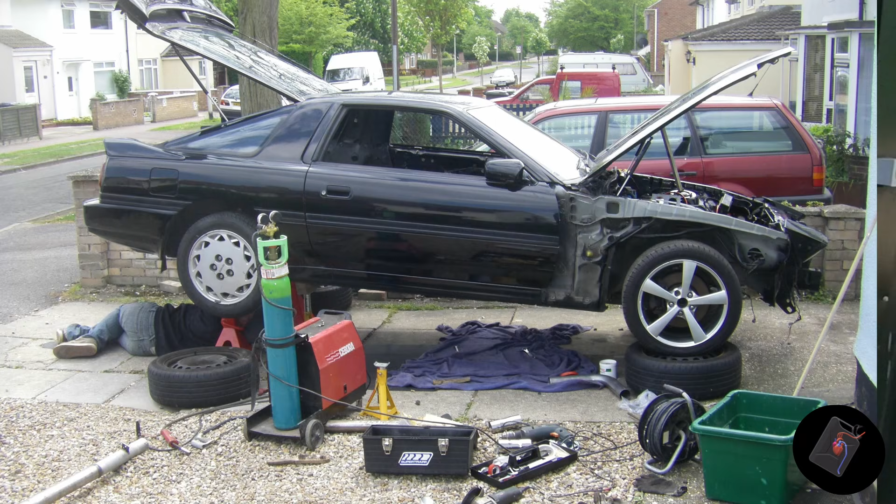The E21 is a 316 from 1983, so it's one of the latest E21s. I've owned it since 2015. I've taken it to the Nürburgring once after owning it for only 3 months, which is about the amount of time it took to fix most of its reliability problems. It was stripped out when I bought it with a couple of cheap bucket seats in it.

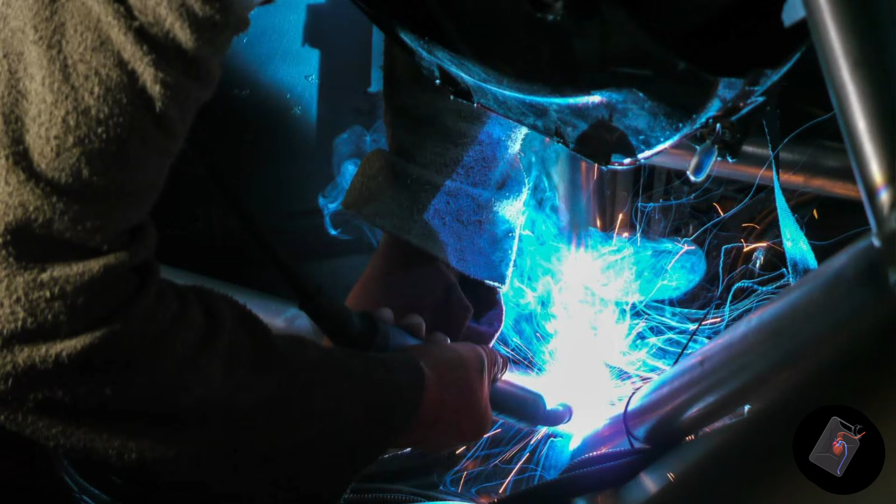Since then, I've fabricated a full 6-point MSA spec weld-in roll cage from scratch, which means I bought the straight tube and used the bender from Garage Sinister, where I used to work, to form the tube, which I then notched and welded in place. I really went to town on this cage.

One of the guides on YouTube on building a cage for a time attack car states that the tolerance on your cage should be 1/2 inch, which is 12.7mm. Mine is less than 5mm. It's a proper work of art, and I'm really proud of it.

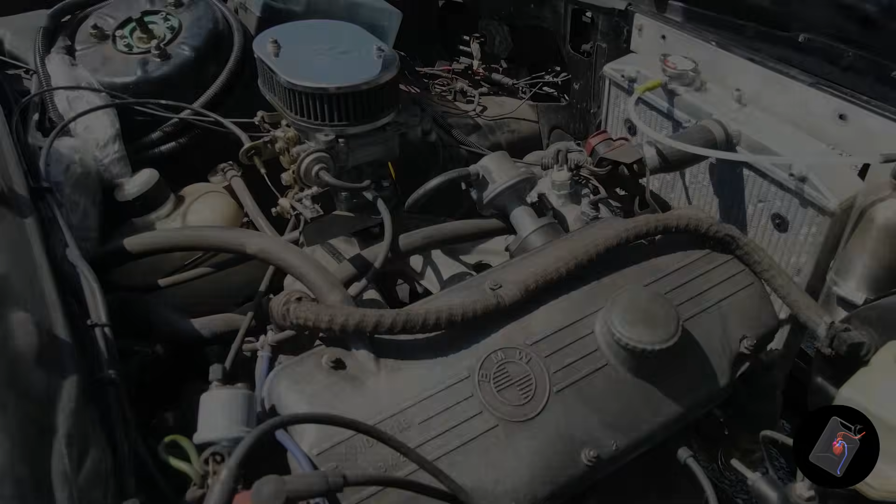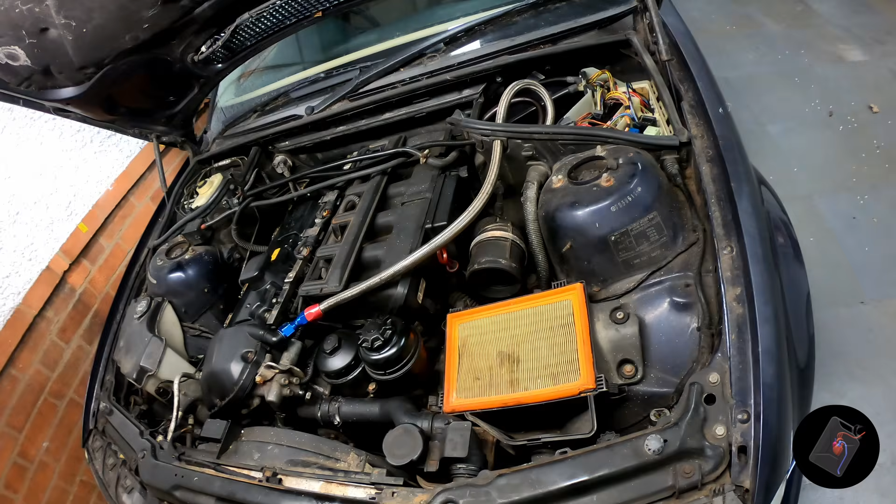The E21 is currently on the original engine, which is a 4-cylinder M10, and although it's badged a 316, it's actually a 1.8 litre engine with a carburettor. This car had already been upgraded to a twin Weber carburettor when I bought it, and I've had it on the rolling road, and it produces 80 brake horsepower. The M54 has, or at least had, 227 brake horsepower when it left the factory in 2001, which is almost triple. This engine is going to absolutely transform this car.

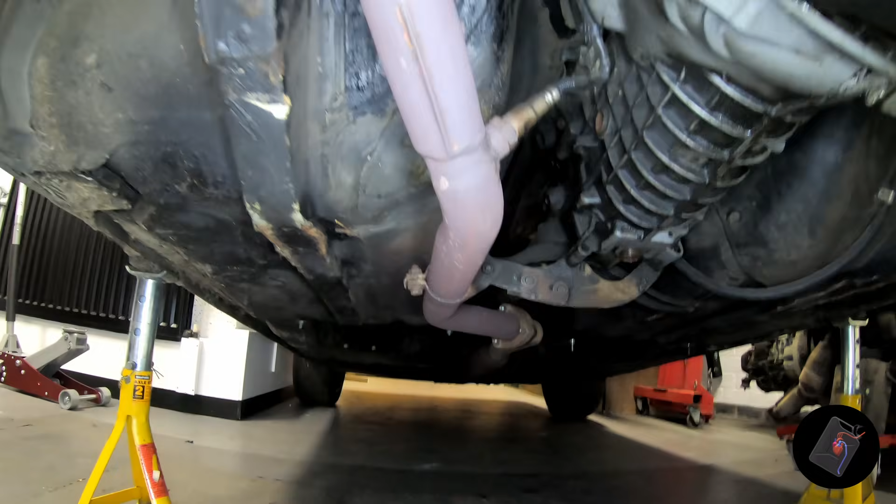Now, I'm not the first person to fit an M54 into an E21, so I am aware of some of the challenges that I'm going to face already. The first one being the exhaust headers are not going to fit around the steering column, and they probably won't even fit inside the chassis rail either. The gearbox mount is not going to fit onto the E21 chassis, so that will need modifying or completely fabricating from scratch.

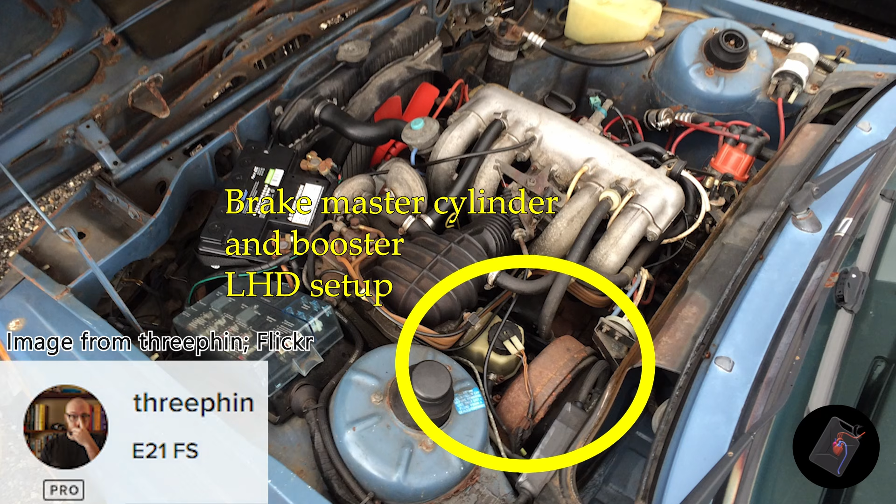The other thing is the brake booster on the E21 sits right at the front of the engine bay on a long extension bar, basically because it was never planned. When the E21 was designed and built, it was for the German market, so it was left-hand drive. When they converted it to right-hand drive, there was no space for that brake booster on the firewall, so it was moved forwards. It may be in the way when the M54 engine is in the engine bay. And then there's all the ECU and all the wiring that goes with that doesn't have a proper home, so that will all need packaging as well.

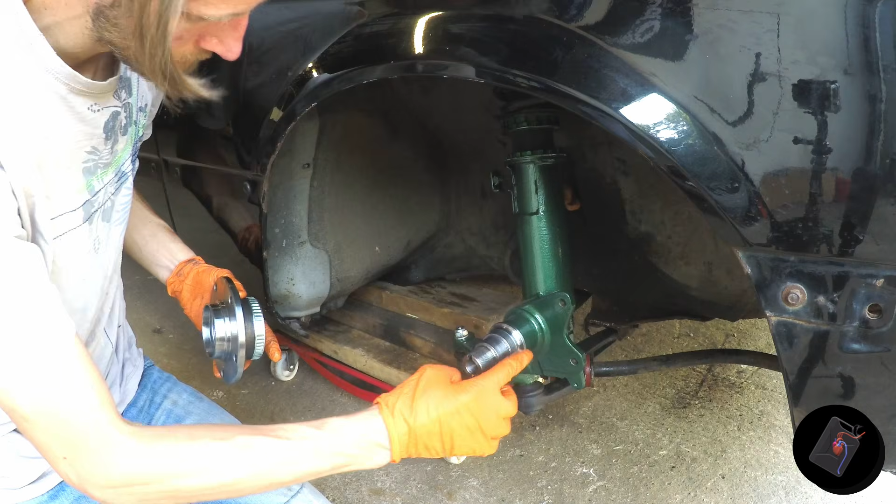I'm also going to upgrade the drivetrain so it will handle the extra torque from the 3-litre engine. I'm going to use the subframe, the trailing arms, the half shaft and the diff from an E28, which is the 5 series from the same era. Now that will give me 5 stud hubs on the back, which will match the front because I've already upgraded the front end to E36 hubs, which are also 5 stud. At the same time as doing that, I upgraded the front brakes to E36 discs and calipers, so I've now got enough stopping power for when the new engine is in.

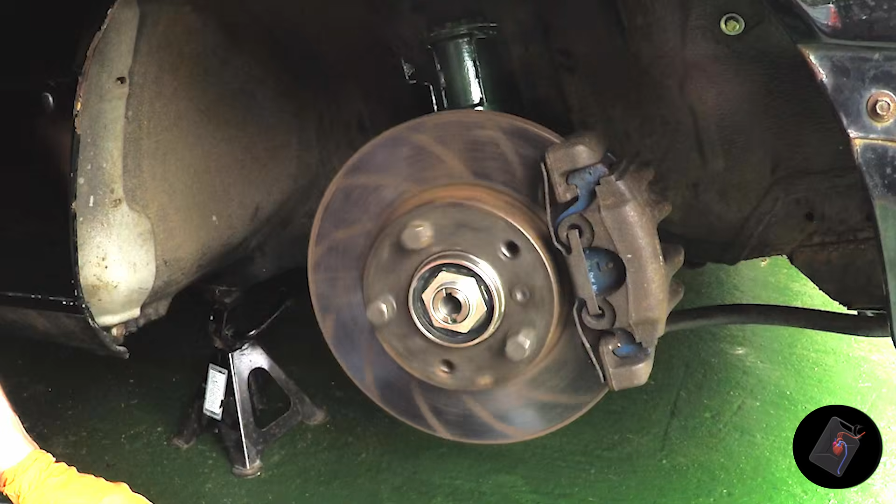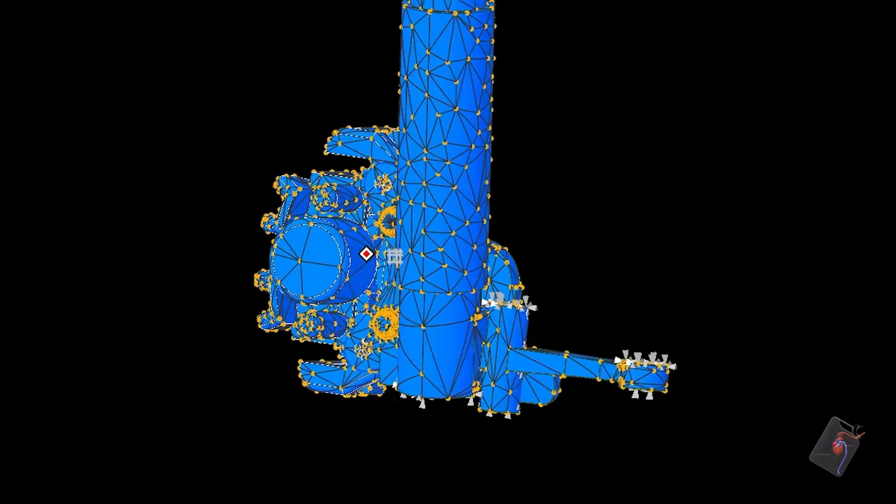You can see all the work that went into that upgrade, including all the CAD modelling, the FEA simulation, and the fabrication work that I did to get those parts to fit in episode 1.

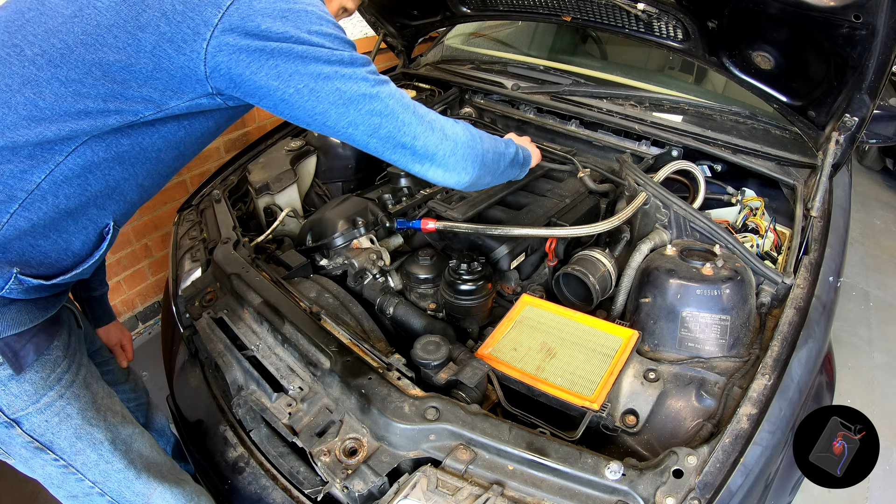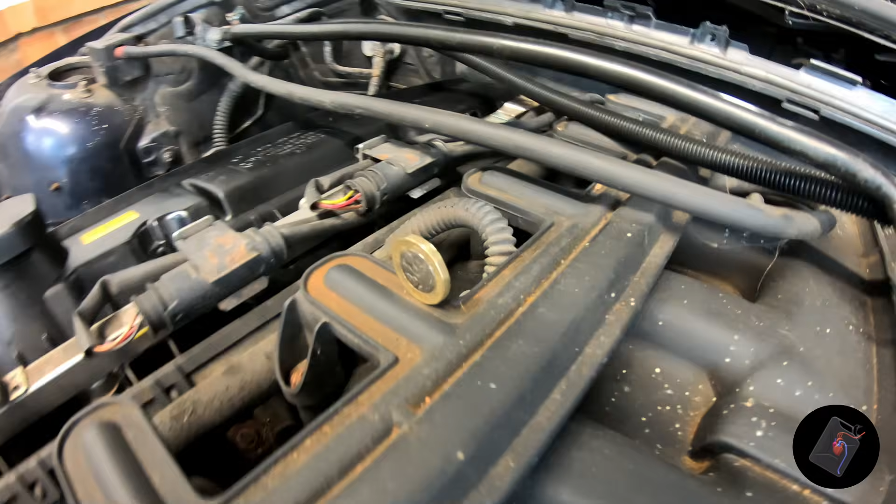For a high mileage engine, the results were actually pretty decent, with the pressures being between 165 and 180. Now that is a little bit lower than I would have hoped for, but they're within 10% of each other, which is all you can really ask for on an older engine. Plus, it runs really smooth and it sounds amazing. So I'm really happy with this engine and I cannot wait to get it in the E21.

The next job for me to do is to take the ECU out of the E46 and send it off to have the immobilizer coded out so that it runs properly when it's in the E21. But before I can do that, I need to disconnect the battery.

Whilst the ECU is away, I'm going to remove the cam cover from the engine and have a look at the cams and the cam galley to see if there's any sludge. Now this part of the engine can tell you a lot about its previous maintenance and how regularly the oil has been changed. So let's take a look.

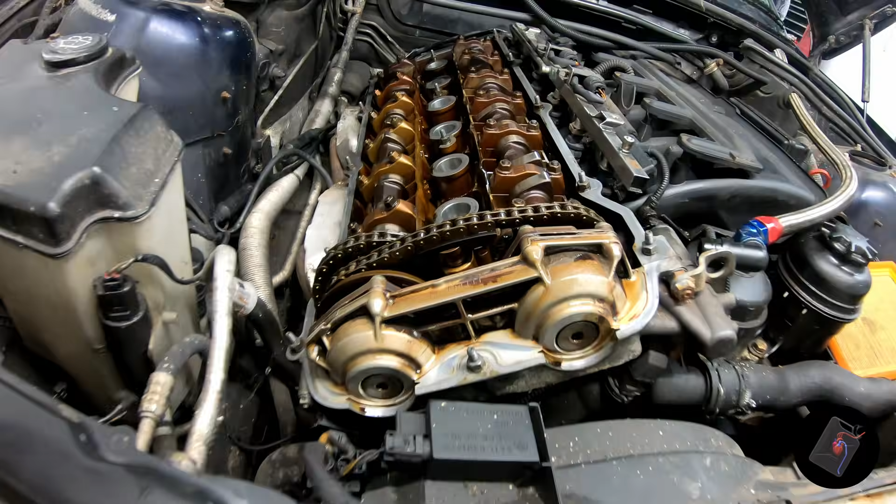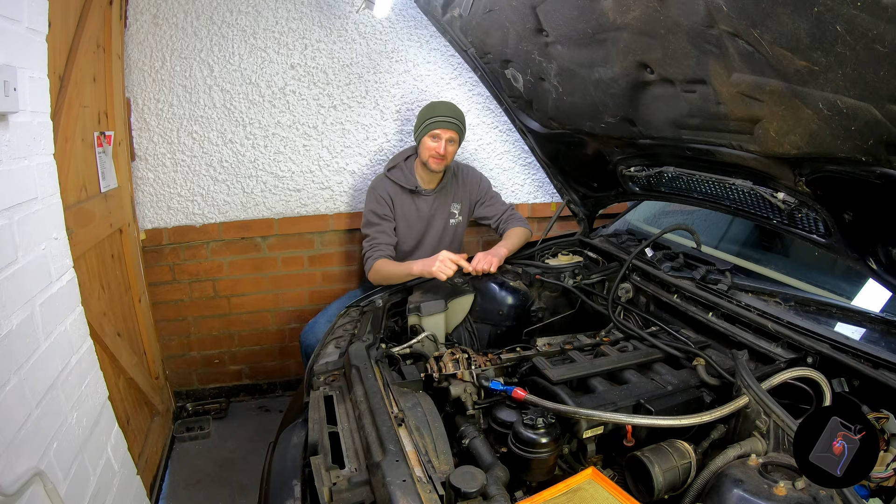Now this could have been a lot worse than it actually is, considering the age and the mileage of this engine. I was quietly hoping that it would be in good condition though, because the previous owner had told me that he'd looked after this car and done regular oil changes on it before it was taken off the road in 2018. And that is evident from the condition. It's not perfect though, there is some sludge around the Vanos unit and inside the cam cover. So I will give this engine a flush using Liqui Moly oil engine flush.

In order to do that, I have to get the engine back up to temperature and run it for 12 minutes. So I need to refit the cam cover. I'll leave the old seal on there because it's actually in quite good condition. Usually on an engine of this age, that seal has completely turned to plastic, but this one is still quite soft, so that shows that it's been replaced.

That also backs up what the previous owner told me about the Vanos units being done, because you would have to take the cam cover off in order to do the work on the Vanos units. So I'm pretty happy that he was telling me the truth with that, and I don't have to open these Vanos units. So I'll give the cam cover a quick clean and wait for the ECU to come back.

So the ECU is back, and I have to say I am so impressed with Ender at End Tuning in Birmingham. He turned this round in 2 days. They were so helpful on the phone when I spoke to them before I sent it, and he explained all the different options that there were available for the reprogramming of the ECU. Now, I've only gone for the basic reprogramming, so that is just to take out the immobilizer and the other sensors and signals, but he does offer tuning options, so slight power upgrades and other things like that, which he explained to me, which I might consider in the future.

So, the big test, now I want to put it back in the E46 and just check that it still runs as it should before I take the engine out and put it into the E21. And that means if I have any problems when it's in the E21, then troubleshooting will be a lot easier because I know it's nothing to do with the ECU.

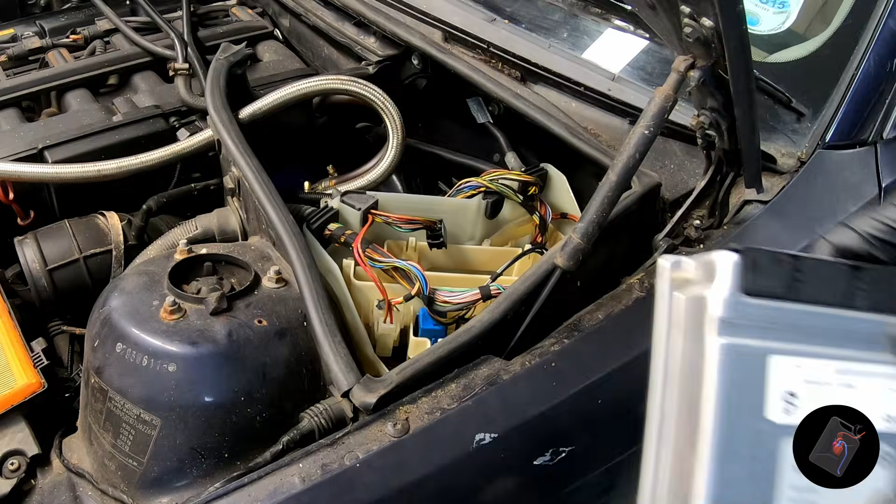Let's get back to the fitting of the ECU. Famously, assembly is the reverse of disassembly. The connectors are poka-yoke, which means they're all different, so you can't get them in the wrong position. Just ensure every connector is fully clicked in place and the security clip is fully home.

Okay, so that's a relief. It all seems to be working properly and there's no warning lights on the dashboard. So that means that the ECU reprogramming seems to have gone really well. So the next job is to jack the car up, warm the engine up, and then do the oil flush.

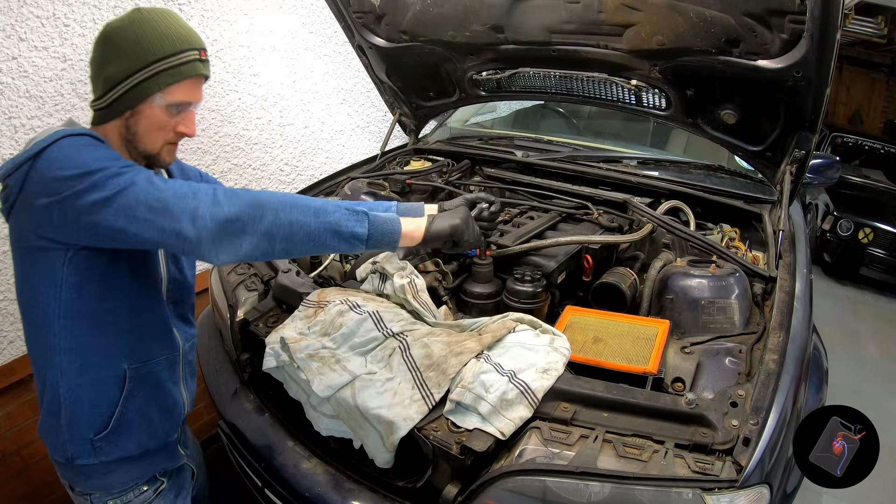The engine flush is performed on the old oil, however a fresh oil filter is fitted first with a small amount of oil being added to the filter housing. The engine is warmed up to temperature, the Liqui-Moly engine flush added, and the engine is restarted and left to idle for 12 minutes.

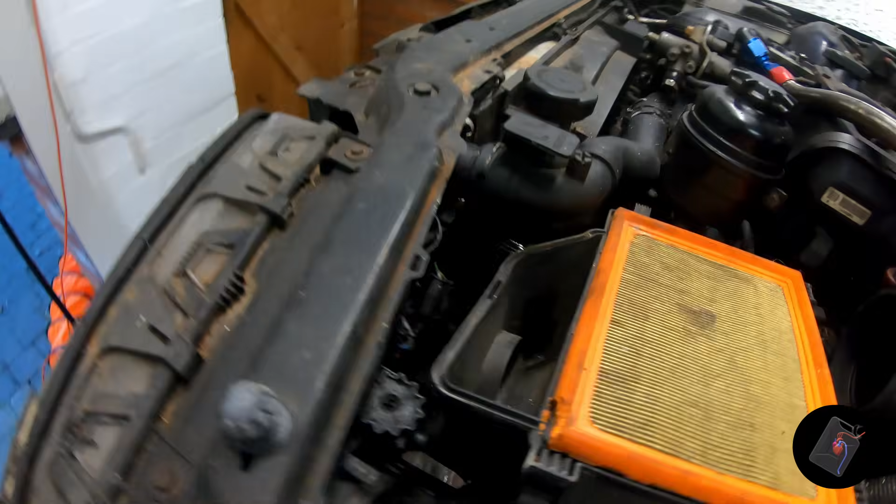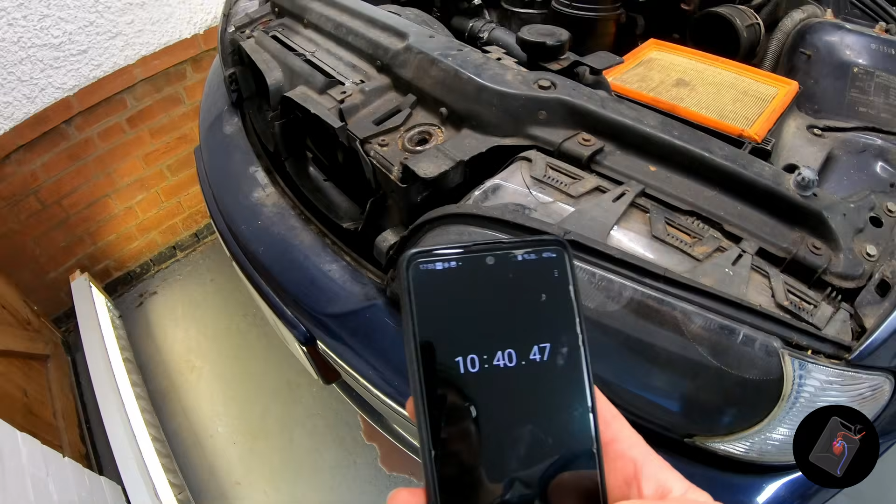The oil is then drained, the filter changed again, and fresh oil added to the engine, which is then left to idle for a further 12 minutes. This dilutes any traces of the flushing fluid, which contains chemicals which can damage seals if they are left exposed to it for too long.

So now the car is in the air, I can get underneath it and have a look at what state the chassis is in. Now, I can see from jacking it up, half of it's already fallen on the floor, so I'm not going to hold my breath. And to be honest, it doesn't matter. I bought this car for the engine and assumed that the chassis was pretty rotten. But unfortunately, there are quite a few engine oil leaks in the engine bay, so I'm just wondering whether there's going to be more oil leaks or more rust.

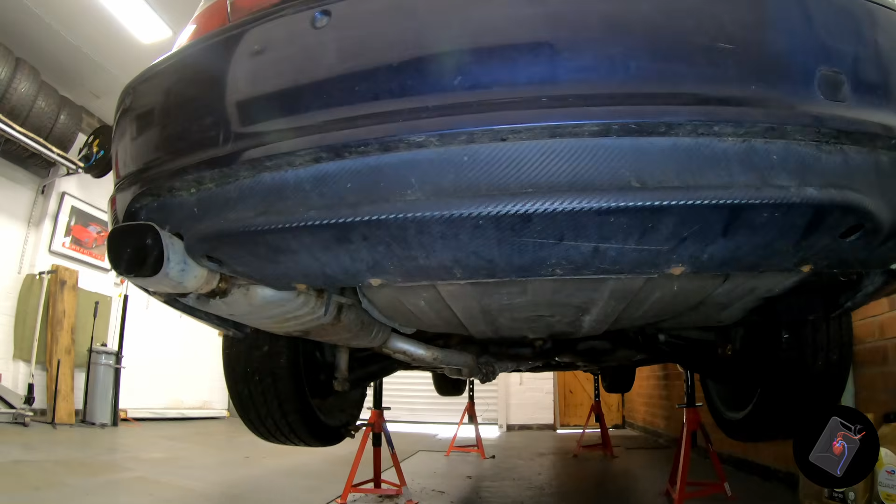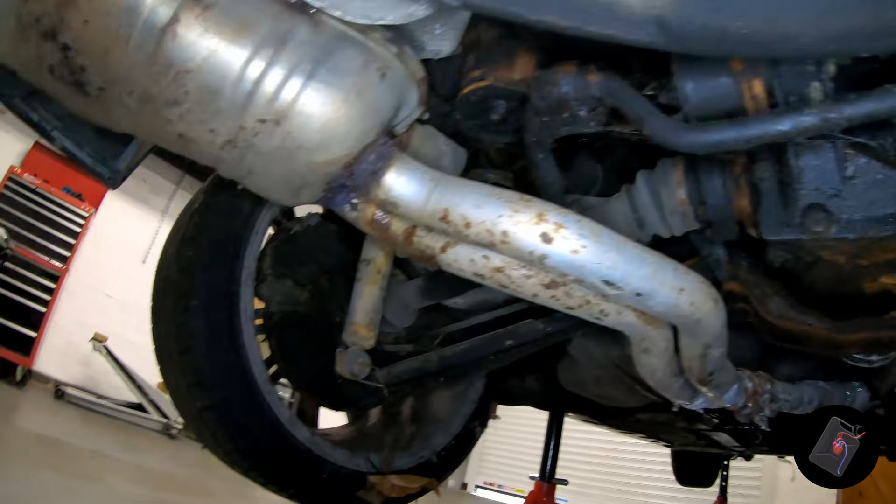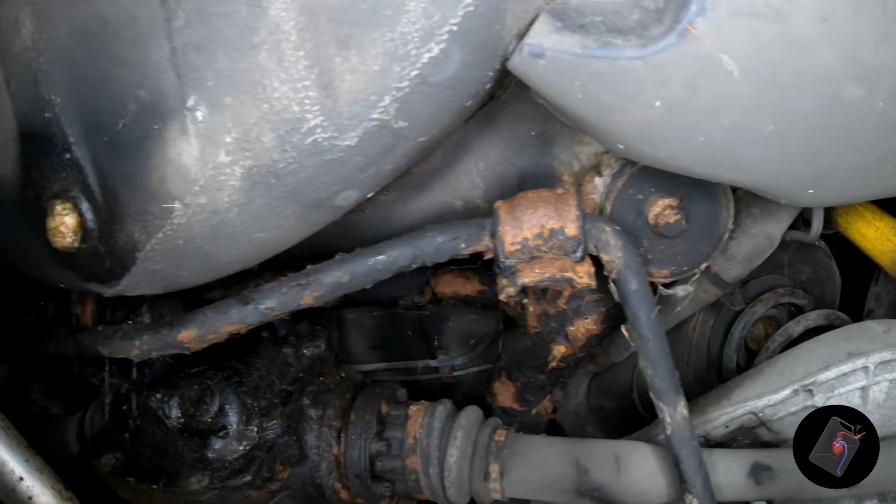The underneath of the E46. Start with this exhaust, that AC Schnitzer tailpipe. That clamp's long come undone. Back box isn't massively rusty actually, although that weld isn't very nice. And then the diff, and the diff cradle, pretty rusty, as are all the casings for the bushings on anti-roll bar and that rear subframe.

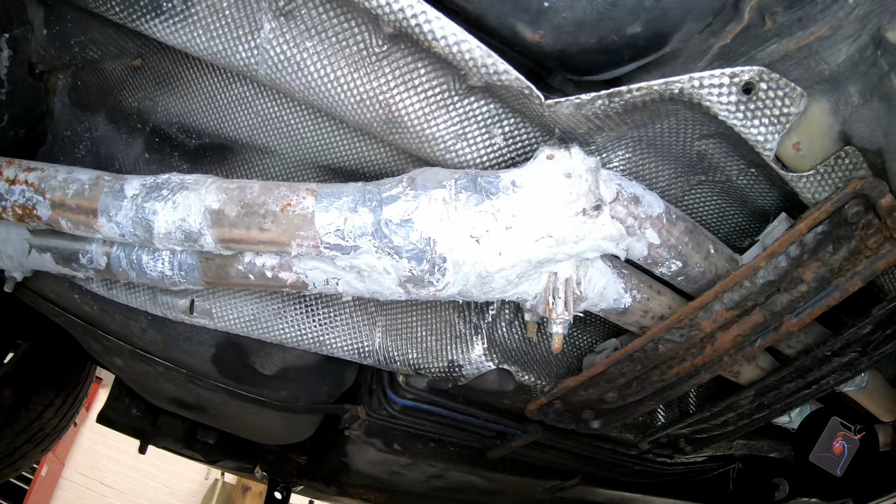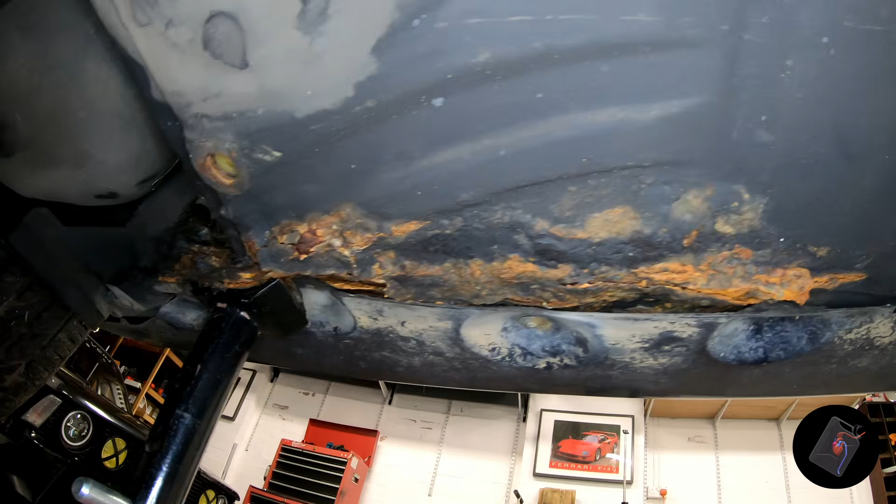Moving forwards, this exhaust is pretty ropey. Oh wow, look at that. So that's been extensively repaired. Let's leave it like that. Could say some other things about that. This jacking point, which is common on all old Beamers, but that rust, it goes all the way along the sill. So yeah, that's not great.

And then this brace underneath the exhaust. The rear one is a lot worse than the front one, actually. More repairs on the exhaust. This section, actually not that bad. Although whether I'll be able to use those flanges, I don't know, look at the state of them. No, they're not usable. And then, this is the gearbox mount. So let's just measure.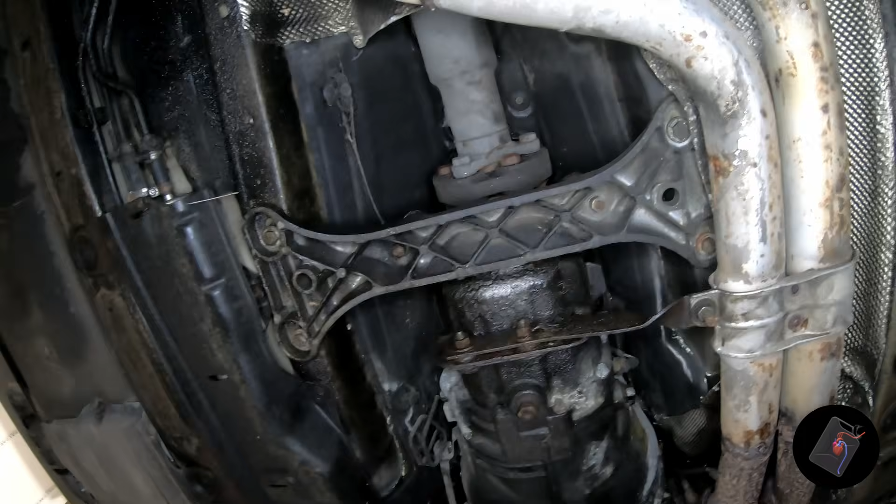So the distance between those holes is roughly 370 mil. And then, what's that, 105-ish? We can compare that to the E21, but I guarantee that is not going to fit. And then coming forwards, oh yeah, there's these flanges.

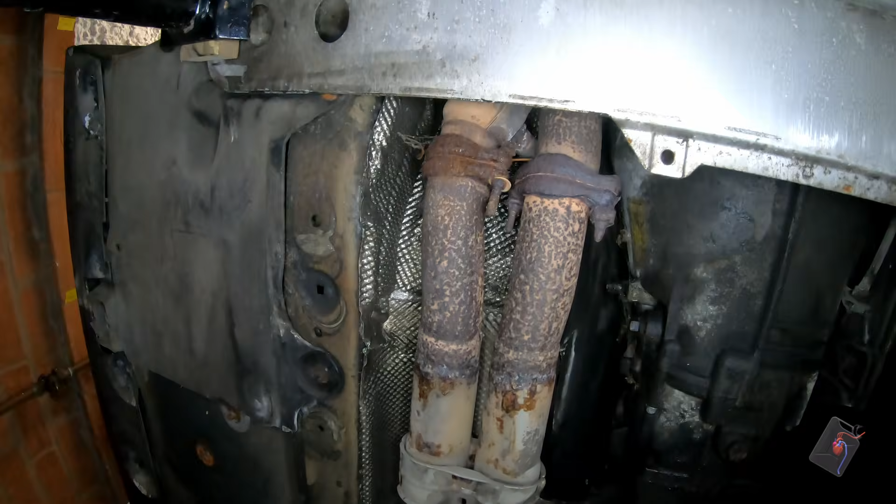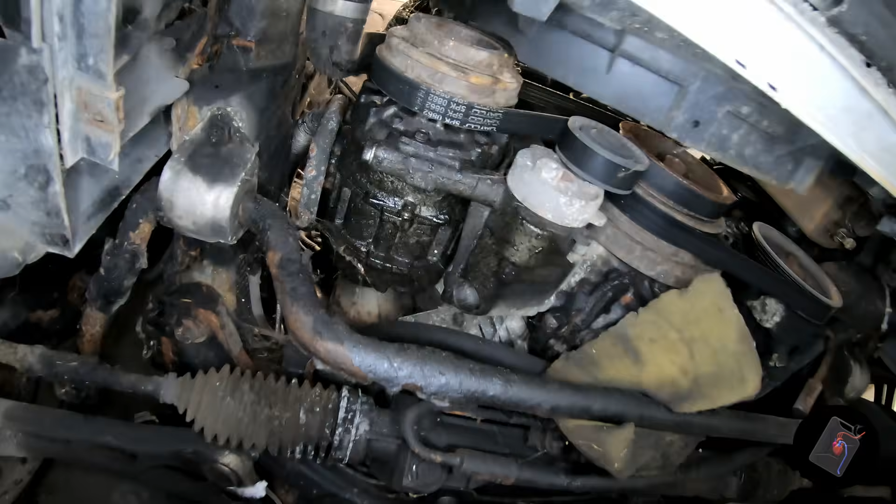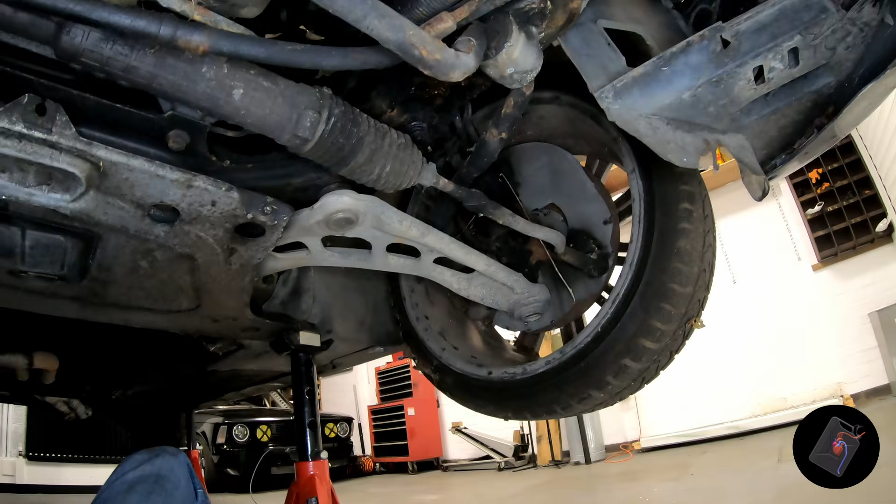In the front of the car. Oh wow. Okay, so there's a sponge to catch all the oil. It's the first time I've seen that. But yes, there's a fair amount of oil under here. And rust. And then this radiator, not sure it should be exposed like that. That doesn't look right. Looks like it's bowed. Anyway, I'm not going to be reusing that. That's only suitable for the scrapyard.

So it was a pretty close thing. I think the fact that the sponge was under there means that I will sway towards there was more oil than more rust. But yeah, I wouldn't want to have to try and put this car back on the road. It would need a lot of welding. So that does mean I don't feel too guilty about breaking it. So that's good. So that literally means there's only one more thing to do. And that is, of course, cue the time lapse.

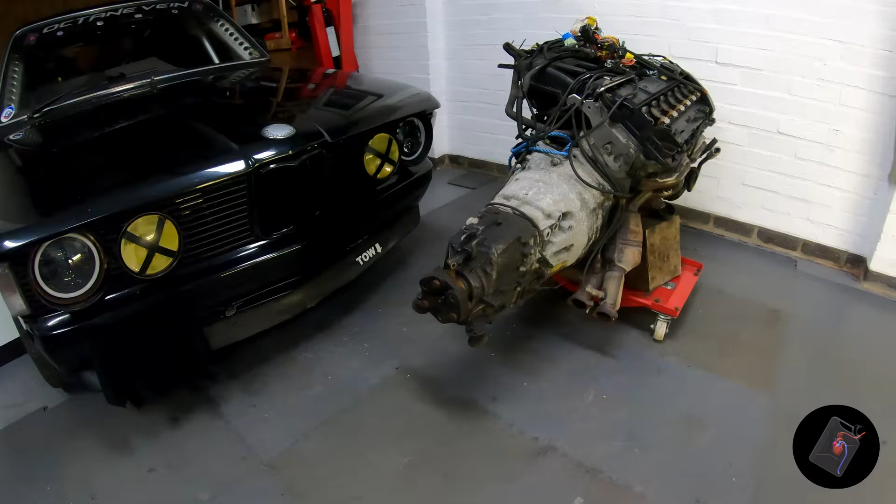In the next episode, I'll take a look at all the parts I had to take off the E46 donor car in order to get the engine to run properly in the E21. And after that, I'll be taking a closer look at the M54 engine itself. Spoiler alert, it's not good news, and I think I'm learning the hard way that a cheap 330 Ci doesn't necessarily mean a cheap M54.